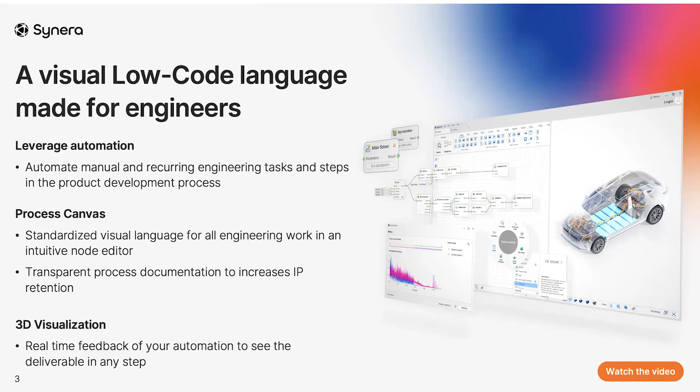And this is how we achieve great KPIs, and that I want to show you. So how do our customers create revenue or create a return on investment by bridging the gap between design and manufacturing? As explained, the bridge itself is Synera.

So it's a digital bridge between the design processes and the manufacturing. And I checked all our use cases, over 50 use cases, and what they all have in common is how they create revenue for our customers. We can distinguish between the design process savings, where automation creates value, and also automation creating revenue or gain in profit in the manufacturing process or directly in the product later on.

One obvious thing is that if you automate workflows that you would usually do manually, you'd definitely save workforce. And we figured out that the average saving we can achieve here is 76%. So 76% of the time that you usually spend manually, you can save through automation with Synera, especially by having use cases in design for manufacturing.

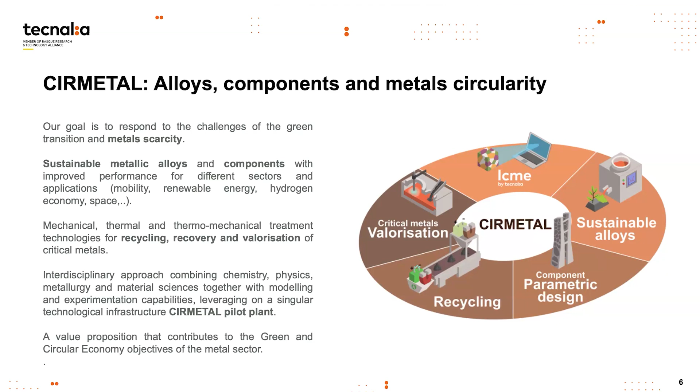TECNALIA, for those who don't know, is the largest center for applied research and technological development in Spain. We collaborate with companies and institutions to improve their competitiveness, and we work in a lot of industrial sectors. In my case, I work in a group called CIRMETAL, which stands for alloys, components, and metal circularity. Here we work for metallic components, and we try to address a lot of things in the cycle. We are able to design and manufacture special metallic alloys, and do very advanced computational design and manufacturing with advanced manufacturing processes for metallic components. But we also have the part to treat with thermal, mechanical, and thermomechanical treatment technologies to recover, recycle, and revalorize the critical metals. We do all this in our pilot plant in Irún, near San Sebastian.

So let's go ahead and see which are the modern challenges in engineering, right? One of the big challenges is that the technological demands show the need for components that are more specialized, lighter, and that reach the market faster. So to meet today's needs, companies must put efforts to specialize more in computational design, but not only that, also in advanced manufacturing processes.

Another major challenge here in the traditional engineering process is the disconnection between design, manufacturing, and validation of metallic components. Right now these stages are often done separately, which makes the process slow and inefficient.

For example, imagine an engineer who designs a part based on experience, choosing a material without fully understanding how manufacturing might change its properties. Then someone else runs simulations to test the design, another person creates a prototype, and yet another tests it.

This back and forth takes a lot of time and involves many people, making the process very complicated. It's clear that a better and more connected approach is needed.

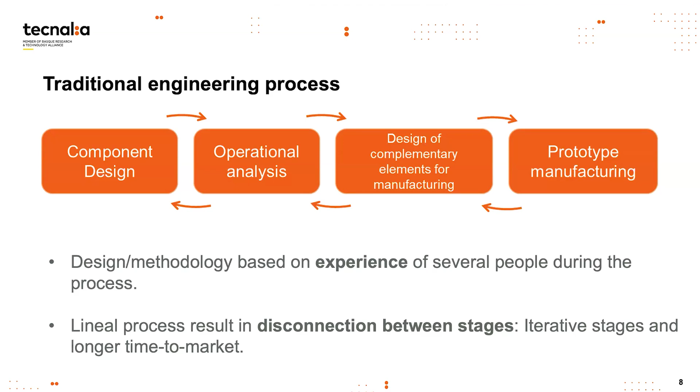So the holistic solution that we propose is to use, for example, the platform ICME by TECNALIA, which helps predict material properties based on composition and manufacturing processes, and also optimize those alloys in terms of composition to achieve the best solution possible.

If we work together with this platform, with advanced computational design tools like bio-inspired design, simulation-driven design, topology optimization, generative design—all those methodologies that we know—and if we also use operational analysis, these multiphysics simulations to predict the behavior of the optimized component.

Finally, we could also use design for manufacturing simulation, where we apply manufacturing restrictions and automate design of the complementary objects needed since the design phase, also analyzing the behavior of the design in a computer-aided manufacturing simulation tool.

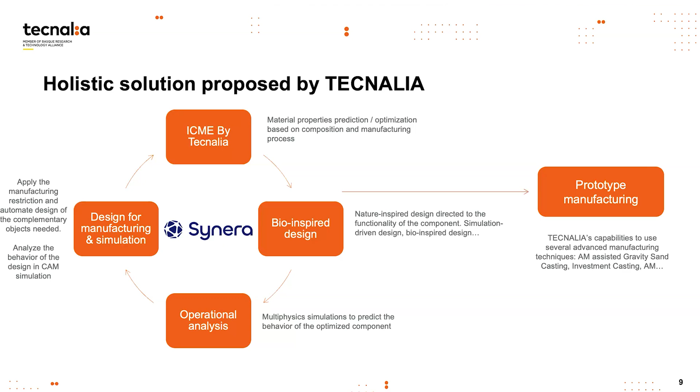We also have the capabilities at TECNALIA to use several advanced manufacturing techniques for manufacturing prototypes—for example, additive manufacturing assisted gravity sand casting, investment casting, and other manufacturing processes in our pilot plant.

So now I would like to introduce the use case we are going to present today. We have seen that the technological demands for thermal management components in certain industries, such as electric mobility, hydrogen-based developments, and high-performance electronics, also have applications in different industries such as space, automotive, and aeronautics.

These need very high tech optimization in order to achieve lightweight and efficient components. They usually come with complex geometries that are hard to manufacture, so we have to develop advanced manufacturing methods and know how to use them.

The use of material property prediction is also very important in terms of the manufacturing process we're planning to use for manufacturing our prototype, the composition of this metallic alloy, and the operating temperature of the component itself.

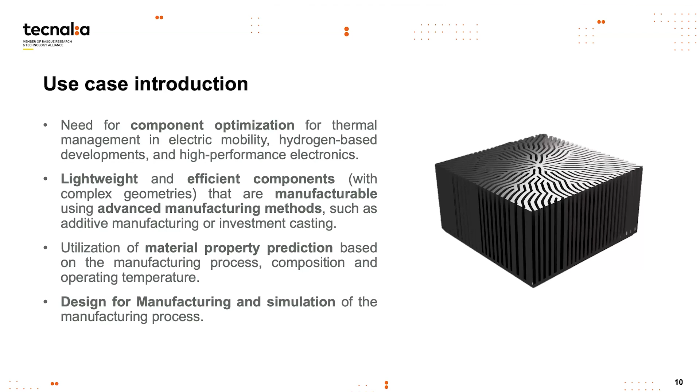Finally, we could again use design for manufacturing and simulation of the manufacturing process. Now let's dive into a live demo inside our ICME by TECNALIA platform, but also in Synera.

So here you can see ICME by TECNALIA platform. It's ICME because of Integrated Computational Material Engineering, which is a methodology that connects multi-scale simulation tools. Its goal is to establish relationships between the chemical composition, manufacturing process, the material's microstructure, its properties, and its performance.

This approach, known as PSPP, for Process Structure Properties Performance, is validated through experiments to ensure the accuracy of the models. ICME by TECNALIA is a platform that integrates advanced models and automates their connection. It is structured into three main modules: the simulation module, the experimental analysis, and the database connection.

Following this PSPP approach that you can see on the screen, the platform includes specific models for each stage. For example, for process, we have additive manufacturing simulation tools using FEM, for example, for SLM process. For microstructure, we have also different models such as CALPHAD, FEM models, or phase field models.

For example, for properties, we have hydrogen diffusion models, CALPHAD models, FEM models. And for performance, we have connected ICME by TECNALIA with Synera for having or doing easy structural analysis.

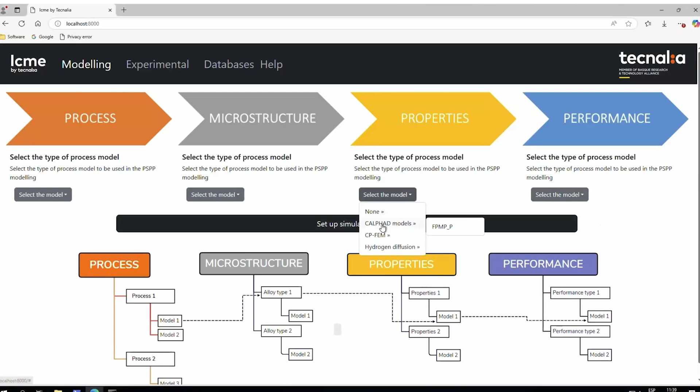So if we want to set up our simulation for our use case, we want to predict material properties based on manufacturing processes and chemical composition. So we will select the CALPHAD model in order to achieve this.

So if we set up the simulation, here you see on the left-hand side of the screen, we have the setup simulation instructions, and on the right-hand side, we have the optimization setup.

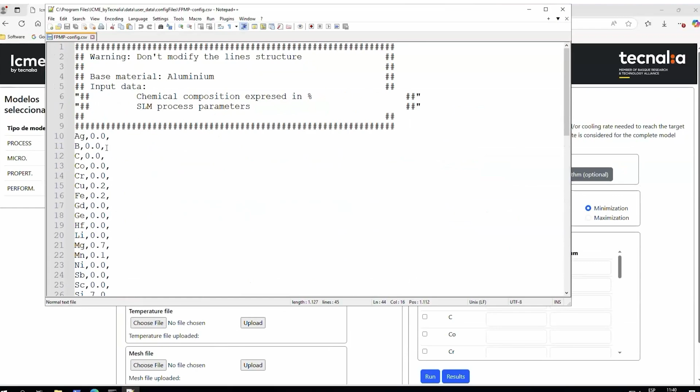So if we set up our simulation, we click there, we'll see that we have an open document in which we have the important parameters for the simulation, which are the composition of the aluminum alloy in this case, and the cooling rate dependent on the manufacturing process.

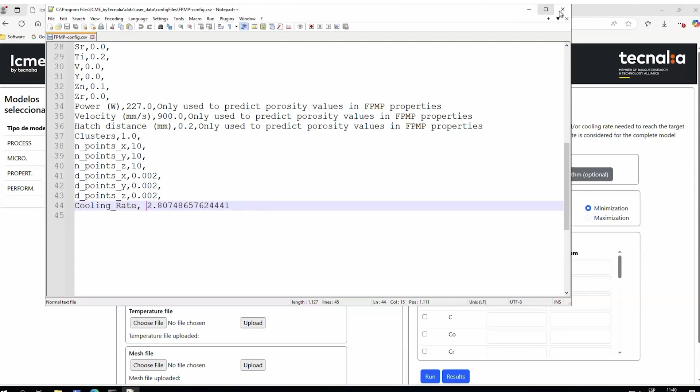So now, if we go and run the simulation, we will see how different data files are created and how these results are shown in different solutions.

Now let's go to Synera. Here you can see our workflow for this use case, which is fully developed by TECNALIA.

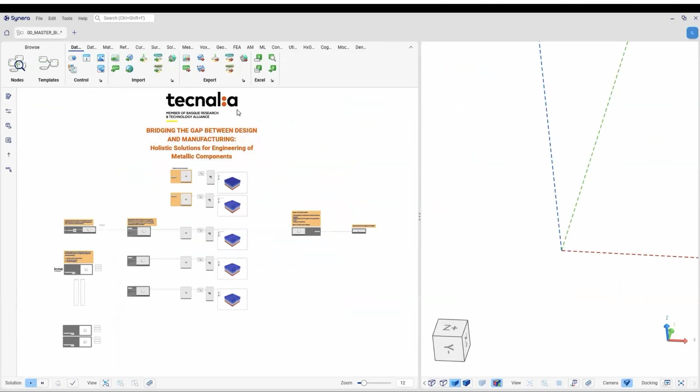We will start by analyzing the geometry creator. Here we have developed a creator for heatsink geometry. We will explore different cases.

First, the bio-inspired design case, which is based on the thermal regulation of elephant's ear vessels, for example, or tree roots. But we will see a traditional case in order to compare both, which is based on rectangular shaped fins.

We have selected investment casting as the manufacturing method because of the complexity of the designs. So the minimum allowable thickness is set to 1.5 millimeters.

We have selected the heatsink side dimensions to be 100 millimeters. We have a radial spacing for the tree structure for the bio-inspired design. And we also have the thickness defined to 2 millimeters.

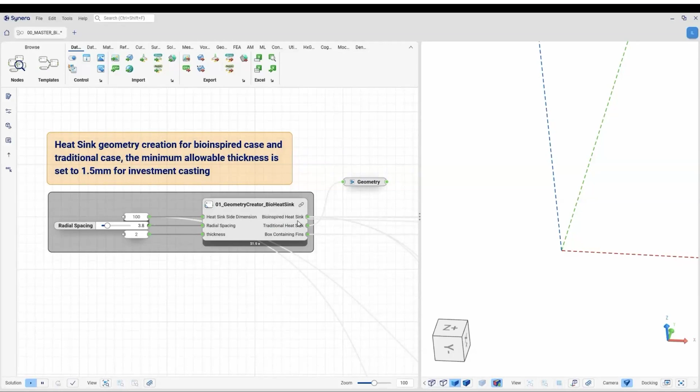Now we will see the results, or the geometrical results, of the bio-inspired heatsink, you can see there, but also the traditional heatsink.

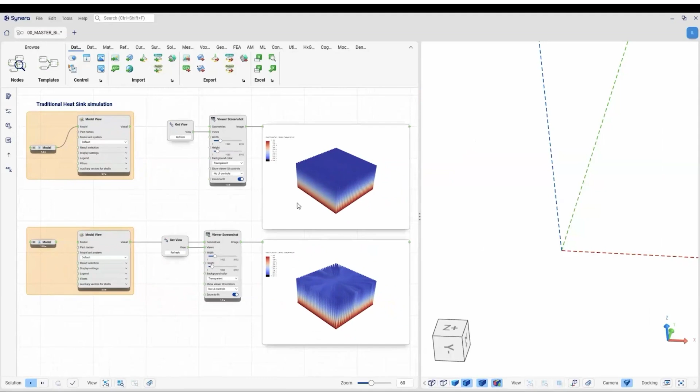Now I would like to start by showing the steady state thermal analysis for aluminum alloy for investment casting A357, and we will see the comparison between the traditional result, which is 258.3 Kelvin as minimum temperature, and the bio-inspired design, which has 257.3 Kelvin temperature. So clearly the bio-inspired design outperforms the other one.

Now let's go to the material properties prediction with ICME by TECNALIA. As we were mentioning, we can predict the properties based on composition, manufacturing processes, and operating temperature.

Here we have selected 3 different manufacturing processes: selective laser melting, gravity sand casting, and investment casting. All 3 of them can be selected with the index that you see there, from 0 to 2.

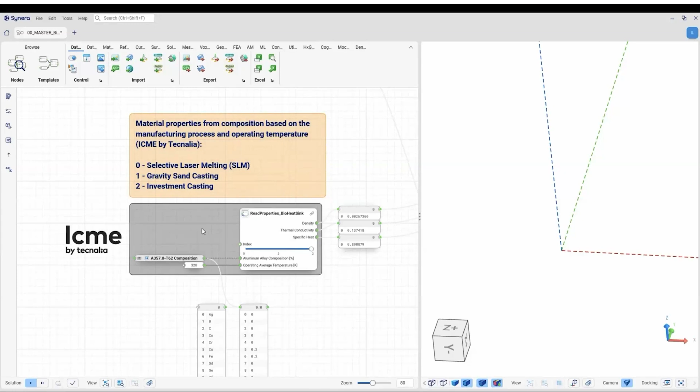And as the input for this component, we have also the composition of the aluminum alloy for investment casting, which has to be ordered in that way in order for the workflow to understand it accurately. And we also have the operating average temperature.

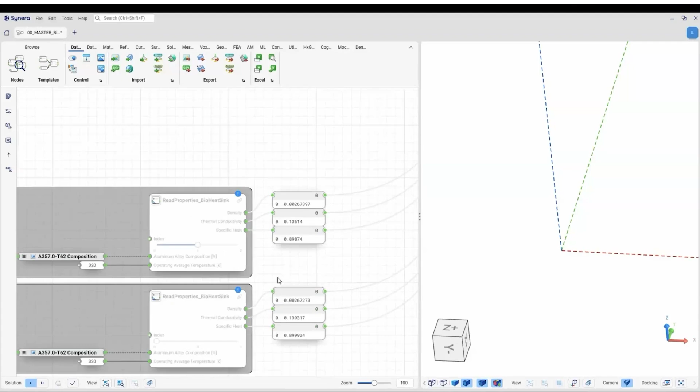Now we would like to perform the same steady state thermal analysis for the 3 different manufacturing methods in order to see how the outcome changes. We have the inputs of the density, the thermal conductivity, and the specific heat capacity to perform the analysis.

You can see there how, in investment casting, we achieve 249.8 Kelvin as minimum temperature. For gravity sand casting, we achieve 249. And for SLM, additive manufacturing process, we have 250.9.

With this, we can first observe a significant difference in the performance of the generic material properties obtained from a database compared to those predicted in our workflow. Second, we see how there is a variation in the results for each of the manufacturing processes.

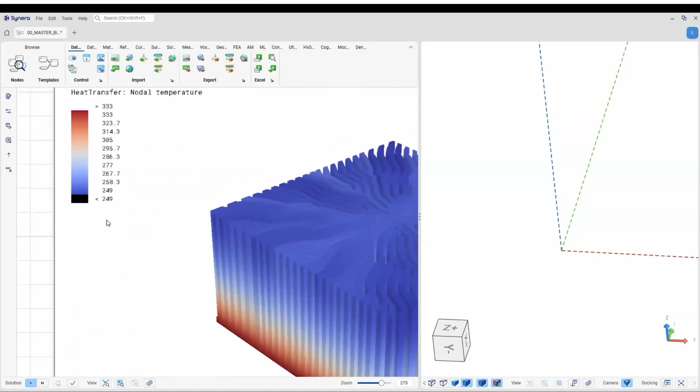In this case, the best solution is not investment casting in terms of performance. We have seen that the minimum temperature is for gravity sand casting, but as it is very challenging to manufacture this part in this way, we have selected investment casting.

Now, to keep on, we should design the casting system. We need to design the gating system with some geometrical rules based on theoretical parameters. We also need to design a ceramic core, which will define the negative geometry of the part and the casting part.

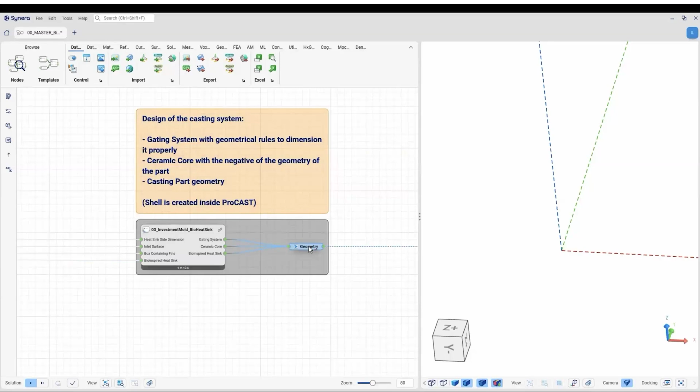The shell that is designed usually for investment casting will be designed in Procast. Here you see the whole assembly: the gating system, the casting part, and the ceramic core.

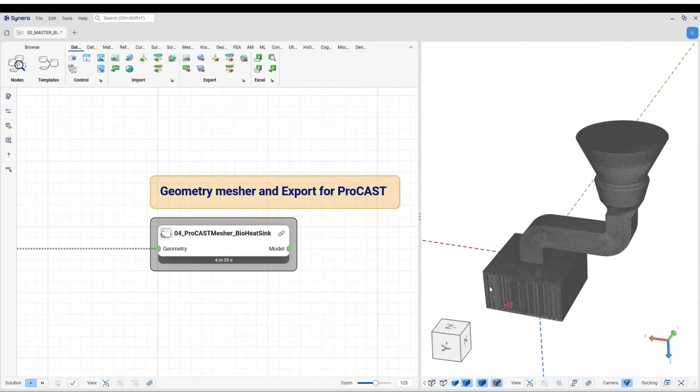Now it is very important to mesh our geometry with accurate mesh, but also in a way that Procast is able to understand our different volumes. So now let's go to Procast.

Here you can see in different colors how Procast is able to understand our mesh. This is what we were looking for. We have to perform the volume mesh and also design the shell for investment casting. You can see there the shell.

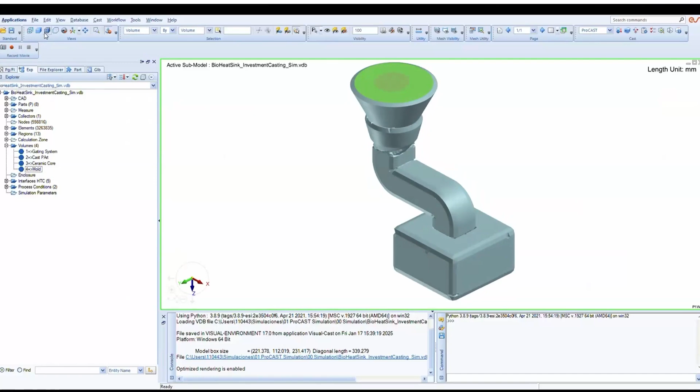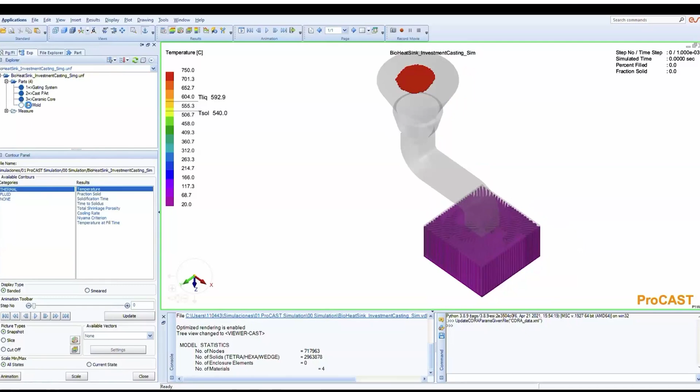Now let's see the results. First, you will see the video or simulation of the temperatures during the filling. You will see how in the tip of the fins of our part, the melt starts to cool, but in the end, the part seems to fill correctly.

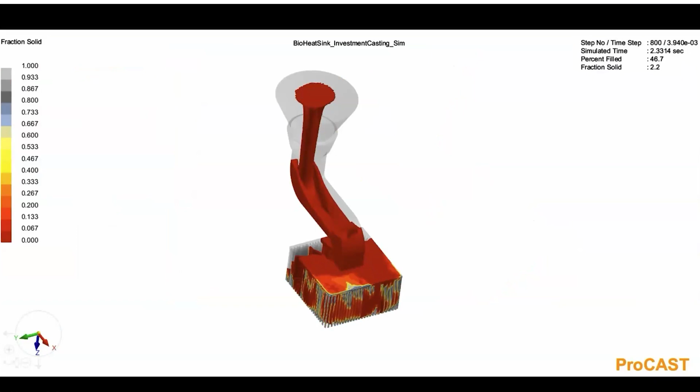You will see also in the next simulation the solid fraction of the part. You will see how, also in the tip of those fins, it will start to solidify before filling completely, but in the end it seemed to fill completely without problems, as you can see in the gray parts where the solidification has started.

So here you have an example of how to use this kind of holistic design. But we also have different examples. For example, we worked a lot with different structural components.

In this case, we are presenting the BioFly project, which was made in the OASIS consortium with partners including the University of the Basque Country, Alfred Wegener Institute, and CEA, where we redesigned and optimized an aeronautic assembly column.

Yes, Sebastian, do you have something to add?

What would happen with those workflows if I now say, hey, we have to change the material? How much effort would it take for you to find a new design that works? There should be no problem, because right now the workflow is developed for aluminum alloys.

So we could change the composition of any aluminum alloy to achieve our desired material property prediction. But we also have different models, for example, for steels or more special alloys. So it shouldn't be a very high effort to change the materials.

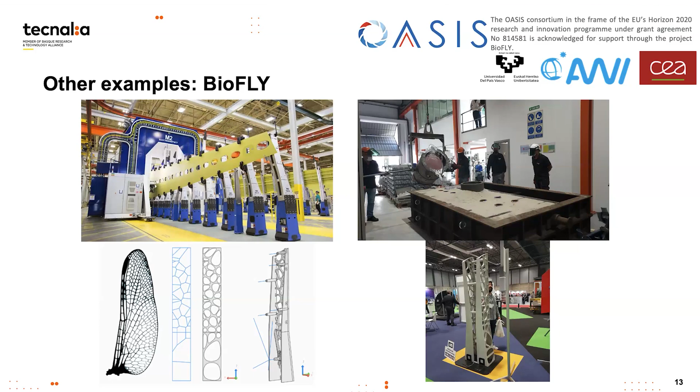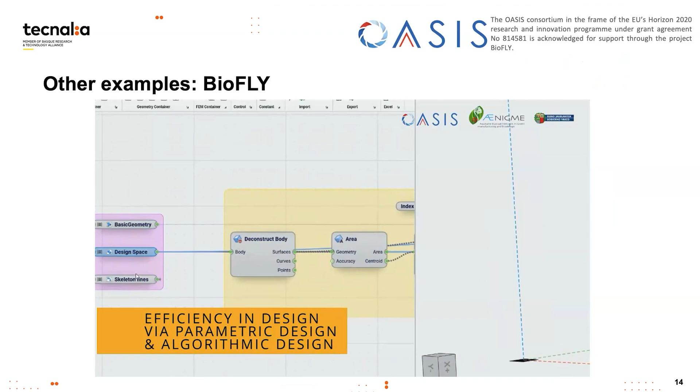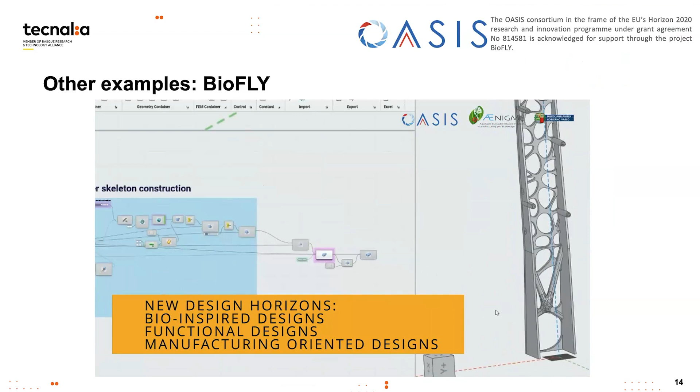I think it will be easier to see in a video we prepared. Here you can see how we also used Synera for our design. We used the load lines from topology optimization to apply a dragonfly wing pattern in the lateral blades of our structure. We compared many different designs, but in this case, this was the best one.

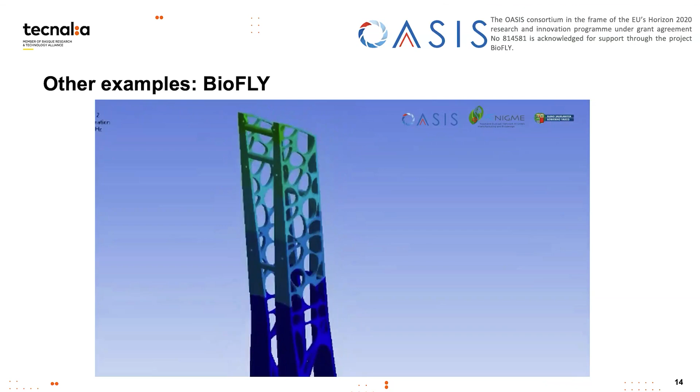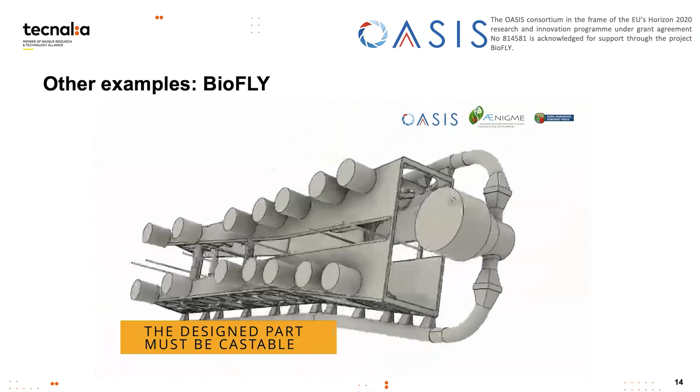Here we can see the validation of all the vibration modes, but it is also very important, as I was saying, the casting design to achieve the best part possible. So here you see how we also perform the simulation of the part, and we filled it correctly.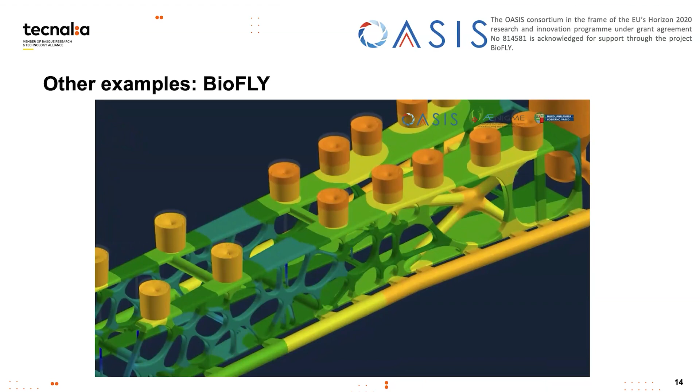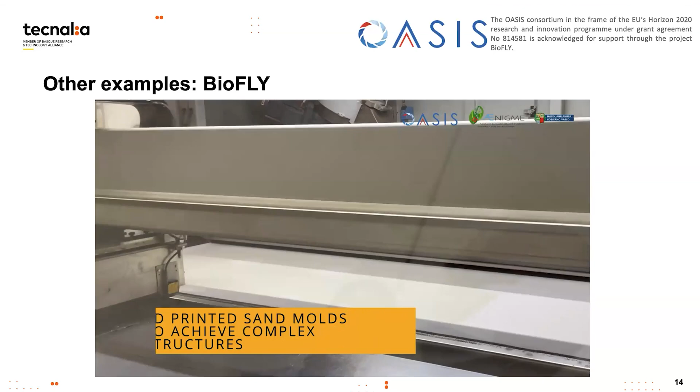When we saw this simulation, we started with the manufacturing of the part, as you can see in the image. You will see here how we manufactured the mold via binder jetting technology.

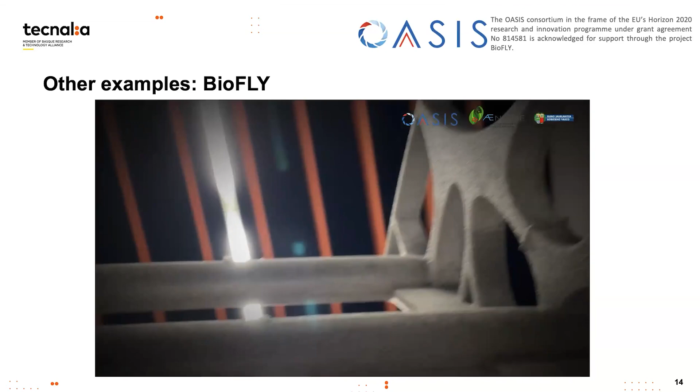This is how we assembled the mold. It was quite complex because of the tight tolerances, and we had 24 parts of sand. As you can see, the part has a considerable size.

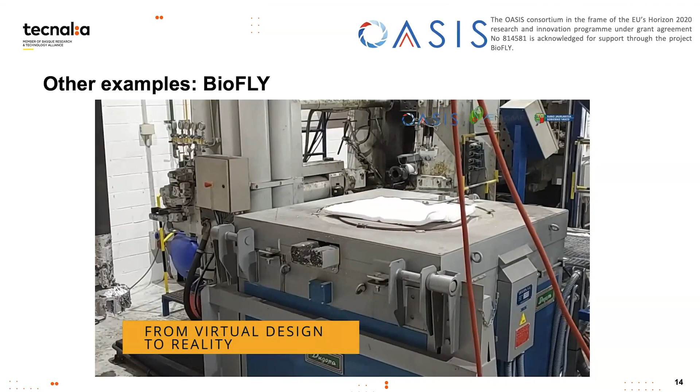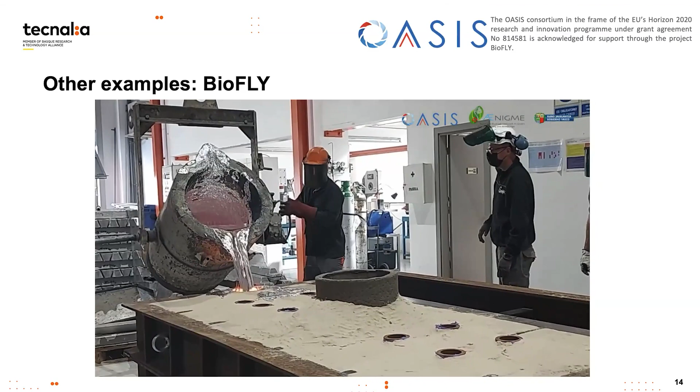Now you will see how we melted the whole quantity of aluminum, how we poured it into the mold in the next video here, and you will see also how it filled the part perfectly and completely.

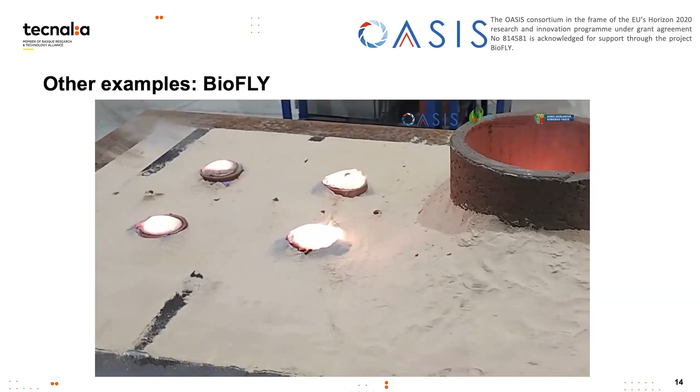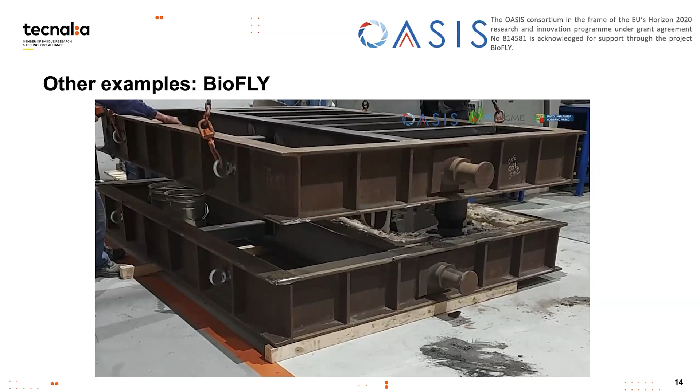Yeah, there you see. And this is the final result. You will see also the demolding operations that we had to do. You will see here how it was—it was like an archaeology operation.

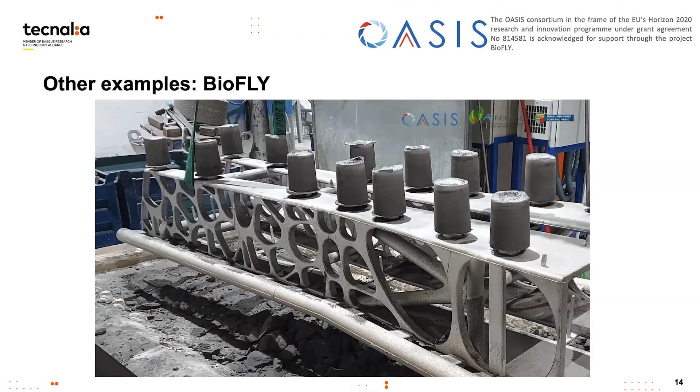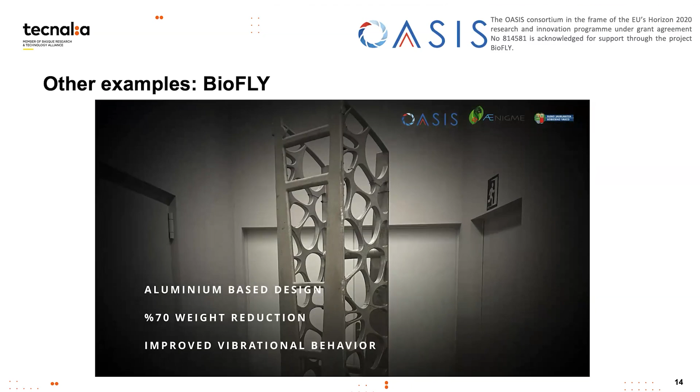All of this was done in the pilot plant of TECNALIA. As you can see, we have the capabilities to produce very complex parts, not just with casting. These are the KPIs we obtained: a 70% weight reduction and improved vibrational behavior of the original structure.

We also have other examples, such as this one, which was a development or proof of concept of a gyroid-based heat exchanger. We are now working on a more complex one, but this is also proof that thermal management components have to be further developed in order to achieve the technological demands. We manufactured this part with binder jetting technology, also in TECNALIA.

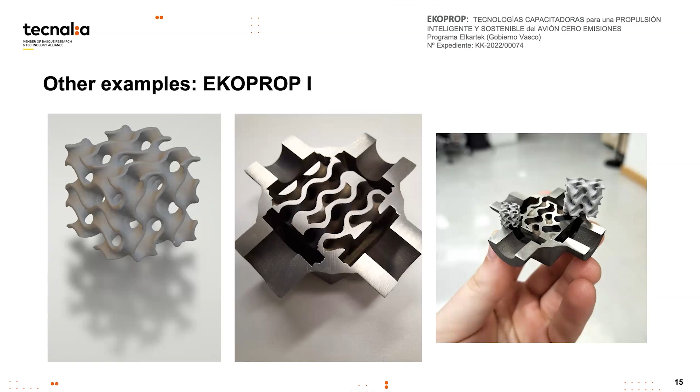Finally, I would like to introduce an add-in that we are right now developing, called eCAST, which in essence will help—in the future, because it's in development—engineers achieve an automated tool to design the casting supplemental elements. This goes in line with what I was saying before about avoiding the problem of the lack of knowledge or experienced workers in factories, giving one engineer the capability, without knowing very much about the process itself, to achieve good casting designs. So how does this add-in work right now?

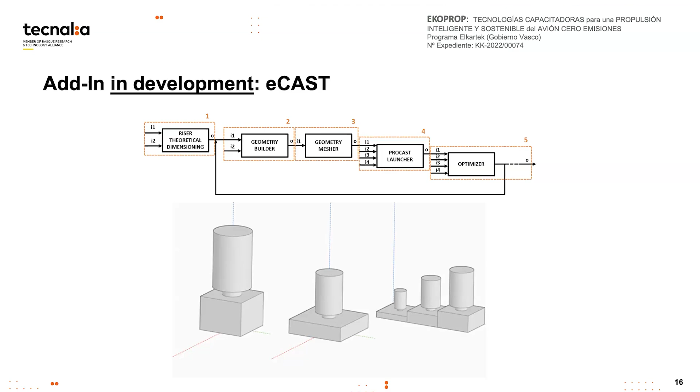Thanks, Ignacio. Awesome use cases. I think now it should be clear to everyone how to really create those great KPIs—weight savings, knowledge capturing, and so on and so forth.